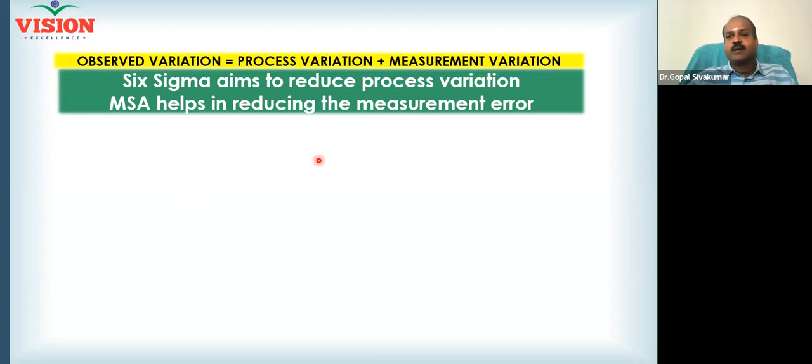So Six Sigma aims to reduce process variation, but MSA helps in reducing the measurement error. First, you should do MSA. Only then proceed with reducing the process variation. So with MSA, we are actually wiping the windshield. If we don't wipe the windshield, it will be unclear and you won't be able to see the road.

So which side is clear? The right side or the left side? The right side is with MSA. The left side is without MSA. If you drive the car without MSA, you probably get a dull, blurred image of the road and then you can't take the right decision, right? So MSA ensures the project team focuses accurately on the process variation. This is with MSA. You are able to see the road. You will be able to see the problem accurately and ensure your improvement efforts are used efficiently.

Otherwise, what happens? You might think that you are on the road and keep your accelerator at a higher level, but actually you are now out of the road. And that could lead to problems, right? So you can see the conditions better and understand the process conditions better with MSA. That is the purpose of MSA.

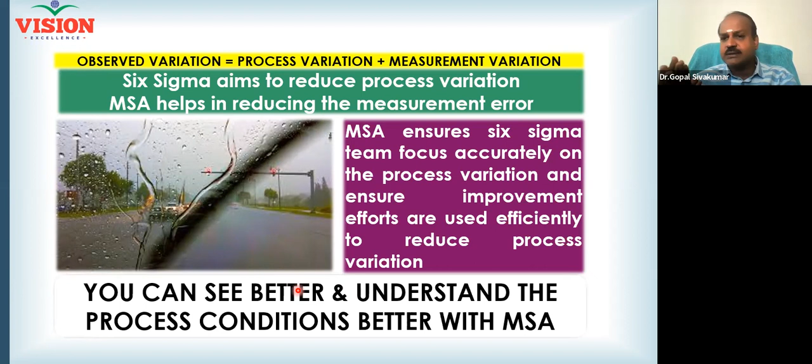And in MSA, there are two types of study. One is to understand our accuracy. Another one is to understand our precision. Accuracy is closeness to the true value. Precision is consistency in our values. Both are important. In order to ensure accuracy, we take multiple readings. Hope all of you agree with my statement. Always, we measure 2-3 times and then use only the average.

Why are you doing so? To bring accuracy. But when you take multiple readings, it is very important that your readings are also consistent. That consistency is checked using precision. And we check precision using gauge R&R.

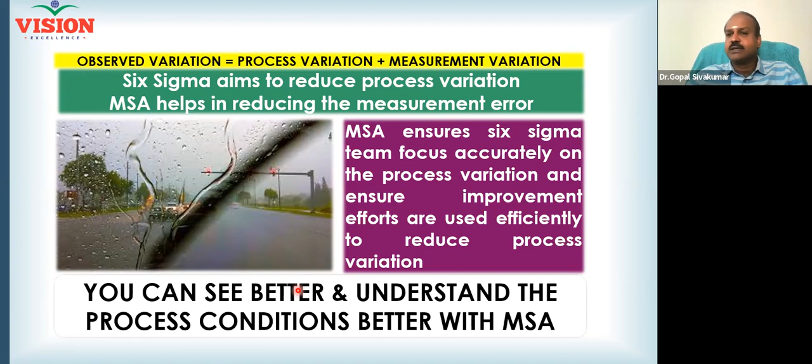Now, all of you first need to understand resolution. I'll explain. Resolution is nothing but the minimum reading that can come from your measuring equipment. Tell me, as far as the inch tape is concerned, what is the minimum reading that can come? 1 millimeter, sir. 1 millimeter. You will be able to measure 1 millimeter. Yes, then the resolution is 1 millimeter.

If you say, sorry sir, I can't measure 1 millimeter using this, I have got a better measuring device, but I will still use this inch tape for measuring, it is in your hands. If you think 1 mm can be measured accurately, then the least count is 1 mm, right? The resolution is 1 mm. In other words, resolution is nothing but the least count.

You all might have used a vernier caliper, dial gauge, and many things, isn't it? Everything comes with a least count. What is least count? That is the resolution. A person at the age of 20 or 25 has eyes with a better resolution. Am I right? But a person at the age of 90 or 95, what will be his resolution? His resolution will be weaker. You need devices with a better resolution so that your vision can be better. Hope all of you understand the meaning of resolution. Am I correct here?

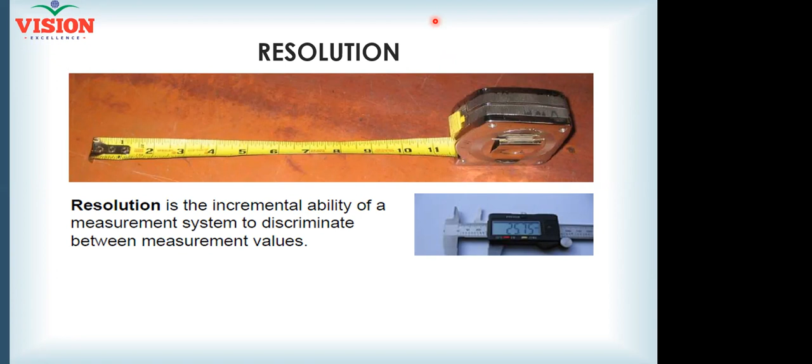Can we all clap for Nurul? This is exactly what I wanted. I need a clap. Nurul deserves it now.

Right? It is not 1 second. It is not 1 by 60th. It is 1 by 100. 1 second is divided into 100. That is why you have 2 decimals, isn't it? So that means the lowest reading that can come is 0.01 second. 0.01 second. I hope all of you have the stopwatch with the same resolution. Am I correct? All your mobile applications.

We are going to do a data collection today, live data collection. Each one of you should use your stopwatch. So keep it ready. So I can also show my stopwatch, right? So here it is. Let me show mine. 00 and 2 more 00, isn't it? That means seconds and 1/100th of a second.

All right. So resolution is the incremental ability of a measurement system to discriminate between measurement values. 1.01 is different, 1.02 is different. Suppose, like Rajesh said, the resolution is 1 second, 1.01 is also 1 second, 1.02 is also 1 second. Do you understand the problem now? If the resolution is just 1 second, it will read everything as 1 second. 1.01 also read as 1 second. 1.02 also read as 1 second. 1.4 second will also be read as 1 second only. Am I correct or not?

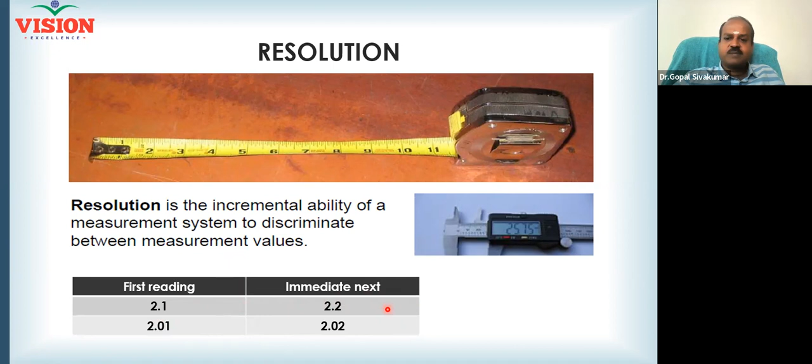So when your equipment rounds 1.4 to 1, it captures an error of 0.4. If the 0.4 is very important to your customer, then you will be at risk. So the better the resolution, the better will be your readings. So the first equipment gives readings like this, 2.1 and 2.2. Now tell me, what will be the resolution for the readings of the first row? What is your guess? Come on, try to answer. I think Nurul has it, 0.1 is the resolution. That's all. You're right. This is what we discussed the last 10 minutes.

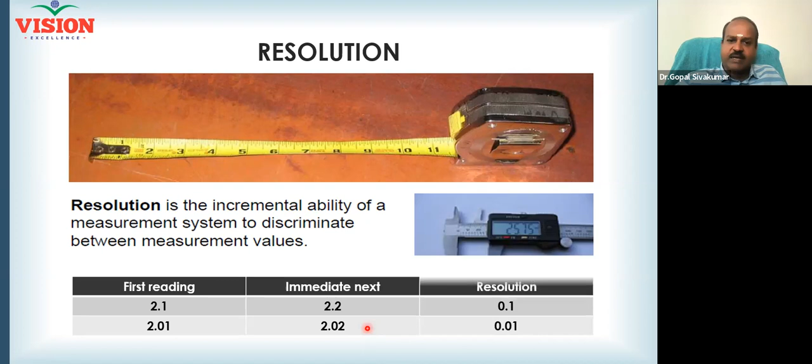And the second row has come from another measuring equipment. It gives readings in this manner, 2.01 and 2.02. Now, what is the resolution? 0.01. Which measuring equipment is better now? Row number 1 or row number 2? Number 2, sir. Number 2 gives better insight than number 1, right? So that's why equipment with better resolution can give better NDC.

So what is NDC? NDC is the discrimination index. How do you differentiate one from the other? Nurul is a different participant. Rajesh is a different participant. Anand is a different participant. I would understand that; the faces are different. If I say all of you are the same, then my discrimination is very bad. Similarly, your measuring equipment should be able to differentiate a good part and a bad part.

Within the good parts, there will be different types of good parts. All of you agree with me? Certain parts will be too good. Certain parts will be just good. If you want to capture everything, your equipment should have better resolution, and so a better NDC, which is called the discrimination index, also known as number of distinct categories. Once the equipment's resolution is known, you can judge whether the equipment is better or not in comparison to another. We always compare one measuring equipment with another mainly based on the resolution and the discrimination index, right?

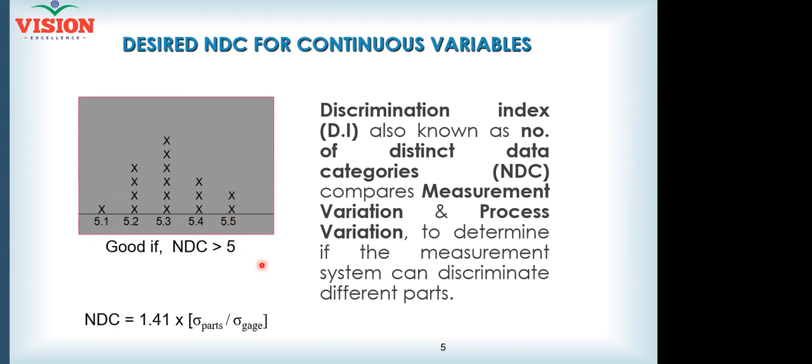Suppose the resolution is 0.01, now tell me how many readings are possible between 5.1 and 5.2? More than 10 readings. 5.11 possible, 5.12 possible, isn't it? In every range you will get 10. NDC will become close to 50. So having a better NDC gives better information. Am I correct now? Better resolution makes your NDC better. So now this is a simple example you have understood very easily.

Even if the situation complicates, if your data has a lot of decimals, you will be able to calculate NDC using this formula. I kept a discrete number of values to make the explanation simple. But when I bring a lot of decimals, let us say 5.1023, in that case you can calculate NDC using this formula. That is when your data is continuous, you can use this. Sigma of parts, sigma of gauge. For that, you must understand what is sigma of parts and what is sigma of gauge, which I will be explaining. Shall we proceed now?

Are you good with NDC? Yes, sir, you can proceed. The industry requirement is NDC must be minimum 5. If NDC is less than 5, the equipment is straight away unfit. 5 in the sense within your preferred range. Whatever range within which you want to collect the data, in that range, NDC should be minimum 5.

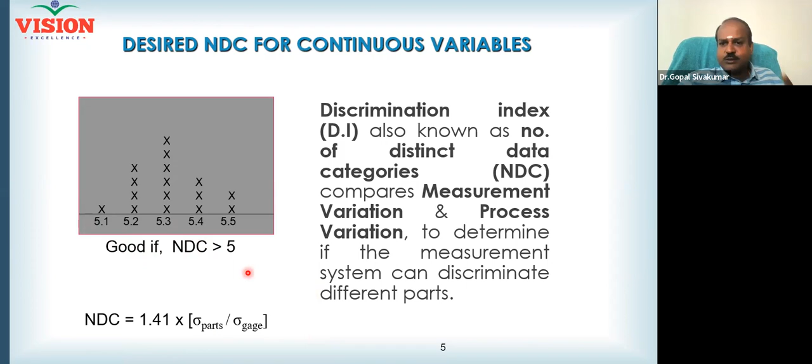Now I want one of you to read out the definition of the term repeatability. Then we will talk about it. Can one of you read out the statement on repeatability? Repeatability is the consistency of a single appraiser to measure the same part multiple times with the same measurement system. It is related to the standard deviation of the measured values.

Thank you, Mr. Anand. So what Mr. Anand is saying now, repeatability is the consistency of the single appraiser. Let us say Anand is the appraiser. I want Anand to measure a product. Let's say I have a product like this, a wooden block. I want to know the diameter of the wooden block.

And Anand has got a vernier caliper. Now he will use the vernier caliper and tell me the diameter of the wooden block. If he takes just one reading, I'm not very confident of the reading. So I expect Anand to take multiple readings, calculate the average and figure out the dimension of the wooden block. Am I correct with my idea now?

Because a wooden block can have some cylindricity issue, isn't it? It can have a different diameter. Am I correct or not? So I take multiple readings. He will take 3-4 readings, and then the average of the readings will be considered as the diameter.

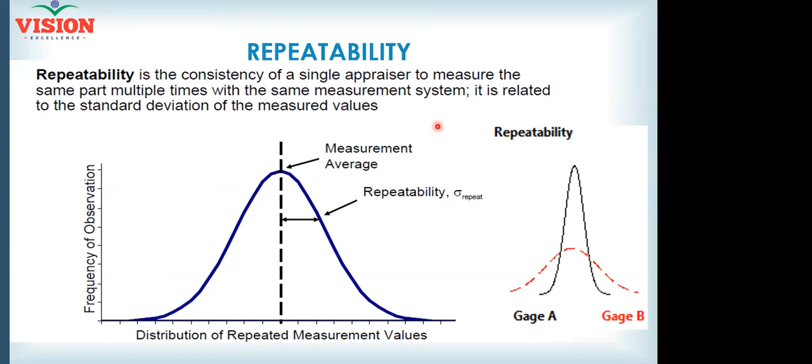What you are doing is correct, because like repeatability, there is one more error called reproducibility error. In order to capture both forms of error, you must involve individual appraisers. You should also involve all the appraisers. Okay, got it, sir. Thank you. So reproducibility is the consistency of different appraisers in measuring the same part with the same measurement system. It is related to the standard deviation of the distribution of appraiser averages.

Now I have a cylindrical block. Let us say I have 3 cylindrical blocks. All the 3 are the same. I gave 1 to Mr. Anand, 1 to Mr. Rajesh, 1 to Mr. Noorul. What is the standard reference value of the block I have? 30 mm. All right. Now Anand is giving me a reading. Rajesh is giving me a reading. Noorul is giving me a reading.

What is the expectation? All the 3 readings should be the same. Am I right? Yes or no? Yes, sir. Because I gave the same product, exactly the same. Only thing is I did not tell them in advance. I asked them to measure separately. Now all the 3 are giving the same reading.

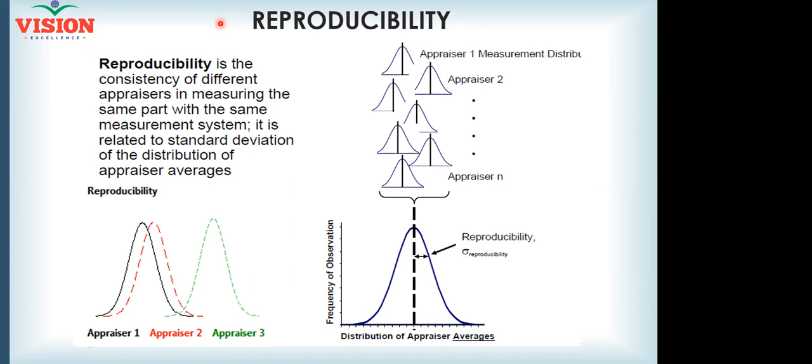Out of all the elements, the majority of the elements are controllable. But the environment you cannot control, isn't it? That is uncontrollable. Any element that is uncontrollable, you must consider as environment. If you can't control it, then try to control your readings by effectively controlling the controllable elements. Do you understand what I'm speaking? Simple English, right? Don't waste your energy trying to control the uncontrollable. Leave it. So focus on the controllable elements.

You can improve the appraiser. You can provide him training. You can improve the operational definition. If the person understands only Hindi, you can give the statement in Hindi only. You can give a picture. You can show him a video. Measuring equipment can be well calibrated, well maintained. And then the part, the standard reference. The standard part is maintained in a condition that it remains a standard part.

See, we are trying to understand the capability of our measurement system in giving us an error-free reading. Two types of error are possible. One is repeatability error, which is inconsistency in the readings provided by a single appraiser. Another type of error is reproducibility error, which is inconsistency in the readings when we involve multiple appraisers. All right.

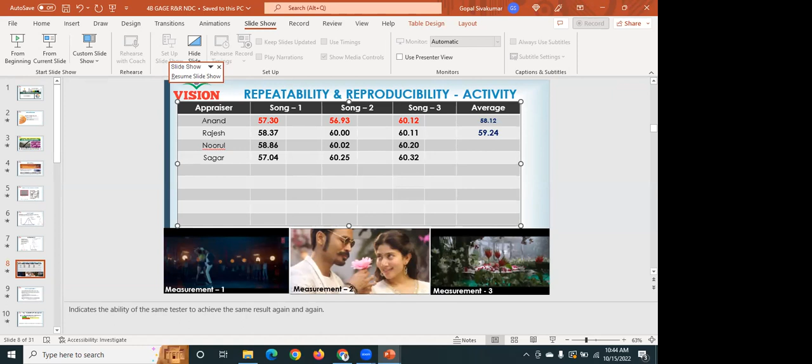Similarly, can I get the average of Rajesh, Noorul, and Sagar? All of you, please calculate and let me know. Now, average of Mr. Rajesh. 59.24. And then the third one, Noorul? Give me a number. Are you calculating, Noorul? For Rajesh, a correction, it's 59.49. Noorul, it is 59.69. Okay. Then Sagar? 59.20. Very good.

Now, I could clearly see a difference in the average values of the appraisers' readings. Anand gave 3 readings. Since the part is the same, I calculated the average of the three readings. Similarly, the average of Rajesh's readings, and similarly with Noorul and Sagar. Now, can you notice a difference between the averages? This difference between the averages is actually called reproducibility error. You don't have to work with the individual readings. You work with the averages to calculate the reproducibility error. Hope it is clear to all of you, how to calculate the repeatability error and how to calculate the reproducibility error.

The reproducibility error is carried in the variation among the averages. So I calculate a standard deviation using the appraiser averages. That will give me an estimate of reproducibility error. Similarly, when I calculate the variation horizontally, like the first row given by Anand, that will be repeatability error by Anand. Second row, that is repeatability error by Rajesh. So now I understand how to calculate the repeatability error and how to calculate the reproducibility error.

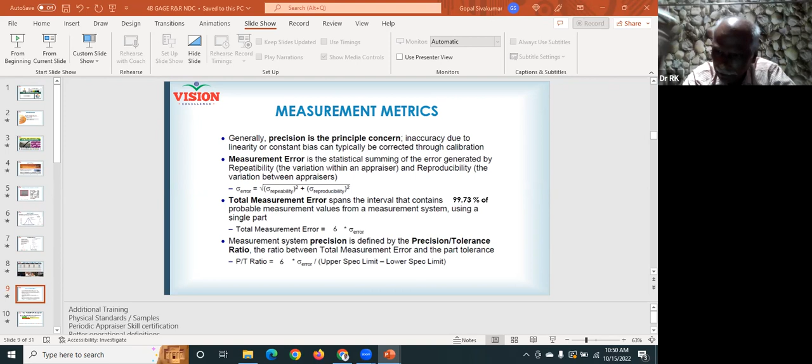That's what my doubt is. Yes, start with one person, then multiple persons, then with the standard process, standard item. Yes, so that actually gives us, correct me if I'm wrong, another aspect also, that is about the precision, that is about the accuracy, how close it is with the standard, right?

So maybe one hypothetical situation: the standard is 60 seconds, everyone measures it around 64-65 seconds. So there is less repeatability error, there is less reproducibility error, everyone is measuring 64-65, but still it is far away from the standard. That means it is not very accurate.

So that brings us, and that is why RK sir has mentioned 3 statements, right? Yes, so ultimately we need to have the accuracy as well. That means how close the whole bunch of observations is to the actual value. And this again, as GSK has pointed out, is only an estimation. Okay, yeah. So ultimately, we want our reading to be accurate.

Accuracy is closeness to the true value. If you are away from the true value, you call it bias. Your bias is more because there is poor reproducibility. Your bias is more because there is poor repeatability. You have more reproducibility error, more repeatability error, and as a result, there is more bias.

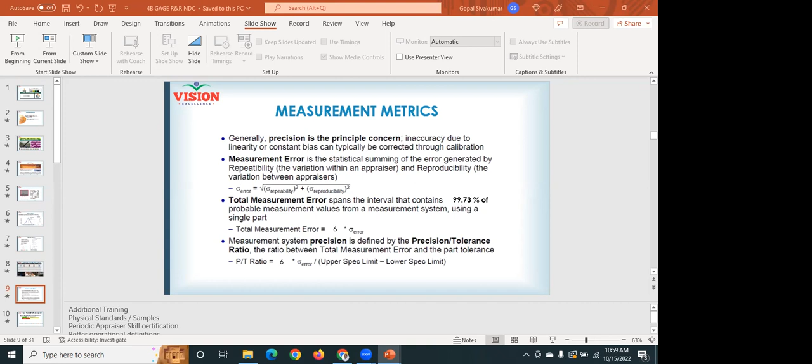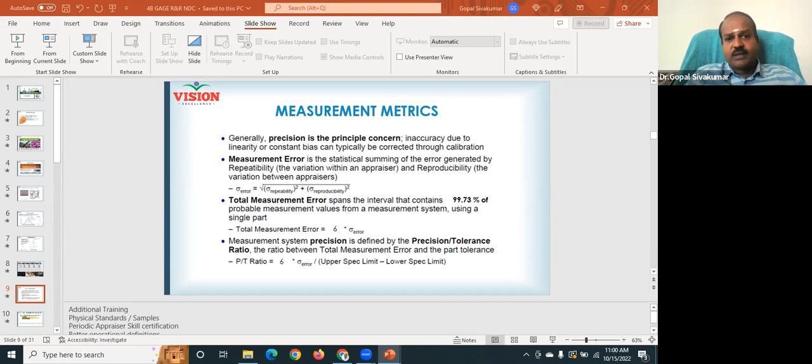Precision error. See, the numerator is the error in the form of repeatability and reproducibility. We also multiplied by 6 to get the overall total error. The total precision error we may commit is compared against the tolerance. Within the tolerance only our process is going to operate. All your readings are going to come in this. Now you are comparing the error estimate against the range of the limits given by the customer. This is called precision tolerance ratio. The other name for precision tolerance ratio is gauge R&R. This gauge R&R value should be less than 10%.

Otherwise, what happens? There will be heated arguments between you and your customer. You will say the product is good. Customer will reject the product. You will check and send the product to the customer place, which is 500 kilometers away from your factory. After receiving the product, customer will check and send back your entire lot. Will it be a problem to your business or not? Yes. Your quality inspectors have checked it. Now the entire lot reaches the customer site, and now the entire lot is coming back.

This is called type 1 error. Sorry, this is called type 2 error. I'm sorry for that. Because you have sent the product, but customer says it is defective. If you send a defective item to the customer, the error is called type 2 error, which will be very costly, isn't it? Yes. The transportation is lost, the item produced is wasted, and there are a lot of problems. Type 2 error, consumer risk.

Similarly, one more problem can happen. Your own quality inspector can reject good products within your factory. Possible or not? Yes, it's possible. Now the manufacturer is under risk. That is called a type 1 error. If you allow the measurement error to increase, the type 1 error and type 2 error will also increase. Your cost of poor quality will increase excessively.

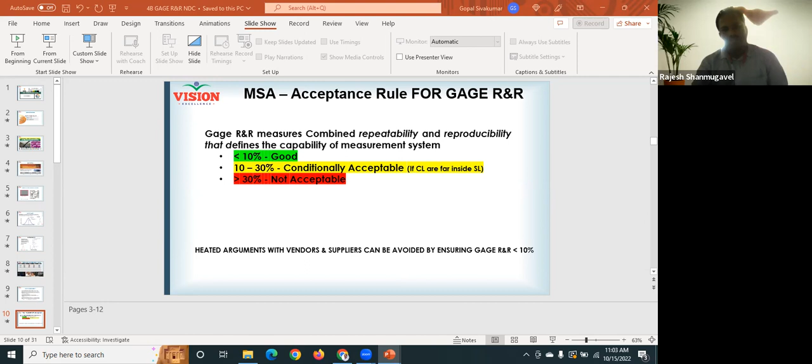Many people don't tell this secret. I am telling you. If your control limits are close to the specification limit, you need to stay only here. Don't use the condition. Don't take advantage of the liberty given. The second condition says 10 to 30% of the error is acceptable conditionally. You can use it subject to the condition that your control limit is well inside. Your process is doubly capable, which is nothing but the Six Sigma process. If your process sigma level is not 6, you must stick to applying only the first condition.

Many people misinterpret this, saying that if the equipment is costly, then it is conditionally acceptable. That is only a situational remedy. It is not the technical remedy. All of you understand my statement here? But in any condition, more than 30%, the measurement system and the data collected is considered useless. Please throw it away. Whether you are doing an improvement project or a big hardcore research, the data collected is considered useless data and it deserves throwing into the dustbin, right? Hope all of you understand.

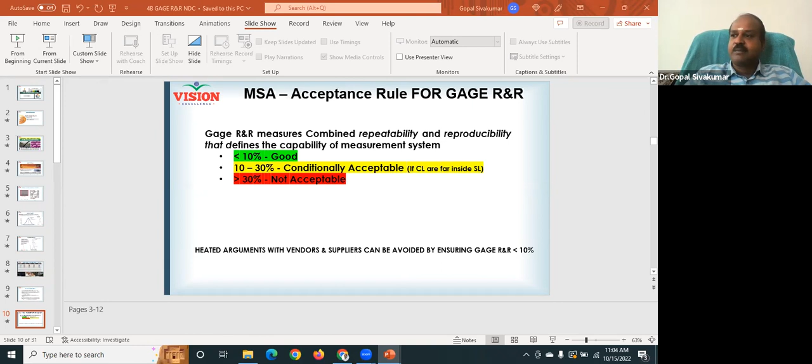And so heated arguments with vendors and your suppliers can be avoided by ensuring the gauge R&R is less than 10%, right? And see here, the customer tolerances are given.

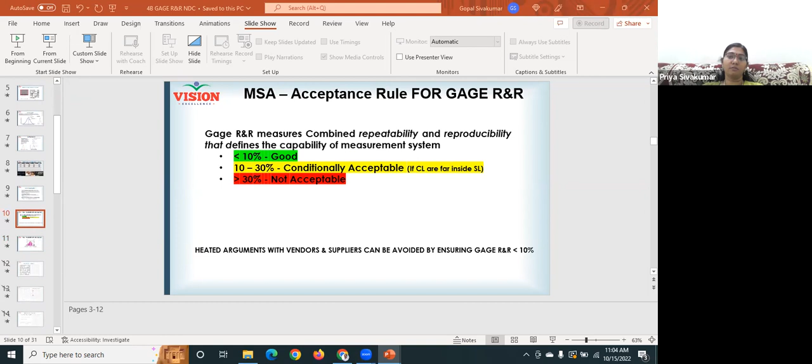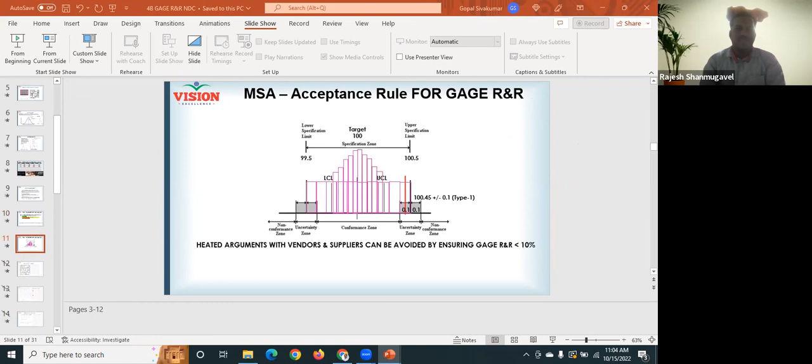Upper spec. Yes, madam, sorry to interrupt. Your screen is not in presenter mode. Oh, really? Yeah. How is it then? It's in the normal mode only, but it is fine. I think I'm able to present. It's going well. Okay now? Yeah, it's fine. All right.

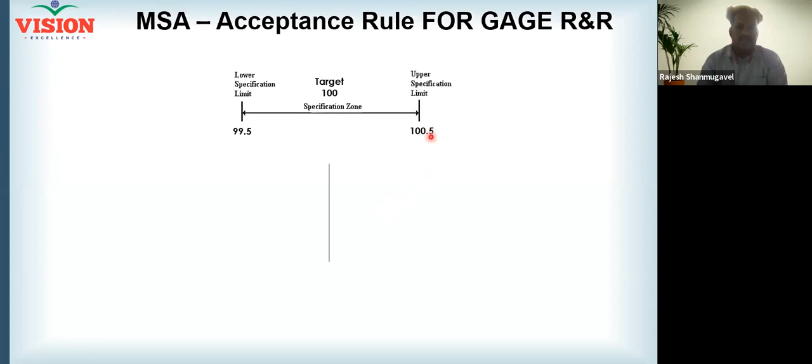So upper spec, lower spec, target value. And now I am just drawing something. Can you see the gray area here? Yes. The gray area is called zone of uncertainty. Here only the problem comes. Here also. This gray area is called uncertainty zone. This zone is called conformance zone. Conformance zone means no problem with the decision.

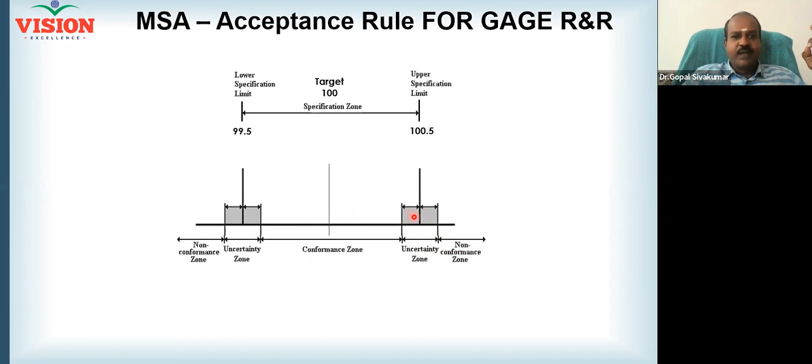But this gray area means a problem with your decision, leading to type 1 error and type 2 error. Non-conformance zone means here also no problem with the decision, but your products are clearly getting rejected. Here your products are clearly getting accepted, but here unclear acceptance and unclear rejection happens. Good product is rejected and bad product is accepted. That is the problem. Why is this happening? Due to the gauge R&R.

And see here, the customer requirement is 100 plus or minus 0.5. Your product dimension is 100.45. When 100.45 is the actual dimension and your appraisers are measuring, due to the error, 100.45 is now recorded as 100.55. Now tell me, what will be your decision? Do you accept the product or reject the product? Reject the product. You reject it. But what is the real dimension? 100.45. 100.45 is inside 100.5. Customer is ready to accept, but your own quality inspectors are rejecting.

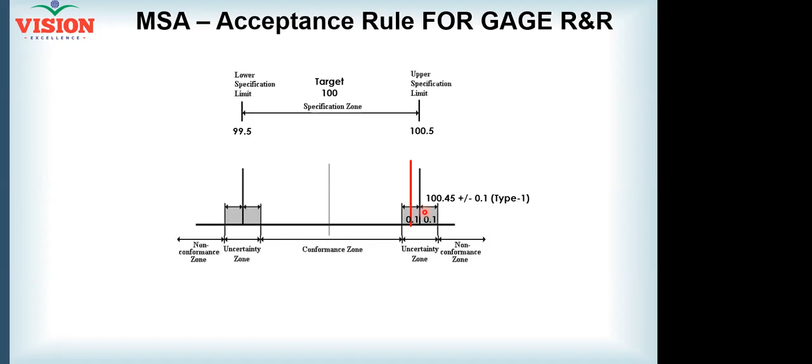Now, what is this error? Type 1 error. So this is otherwise called manufacturer's risk. The manufacturer is under risk because of the error. That is why it is important for us to control it. Why is this happening? Your production process is poorly designed. Sigma levels are bad. Look here, you produce everywhere. Where should you produce? You should produce around the target.

Am I right? Very first day, RK made a statement. Taguchi says deviation from the target is loss. Where is your target? Your target is here. But where are you producing? Far away from the target. As a result, type 1 error is happening. So don't produce in this manner. Try to produce like this. Can you all understand now? Yes. Now the second condition becomes applicable to you. What is the second condition? Control limit. 10 to 30% error is also tolerable now.

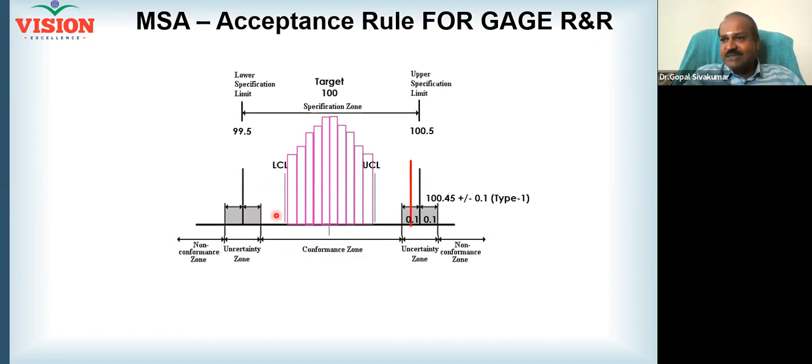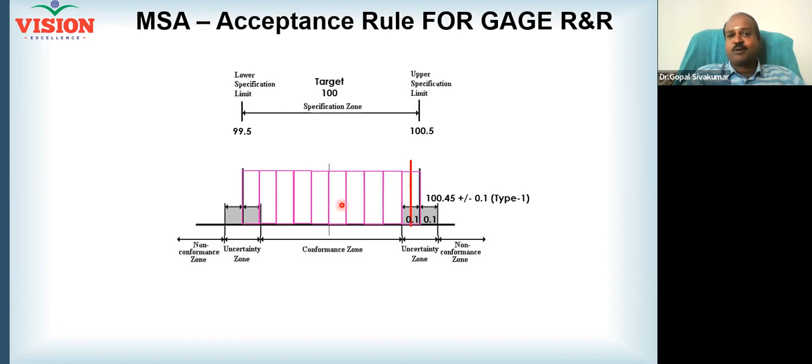Why? You have now additional tolerance. Do you understand? Earlier, there is no room for additional tolerance. You have occupied all the tolerance. Your process is just capable: 3 sigma process, CP/CPK equal to 1. Now the process is doubly capable: 6 sigma process, CP/CPK equal to 2.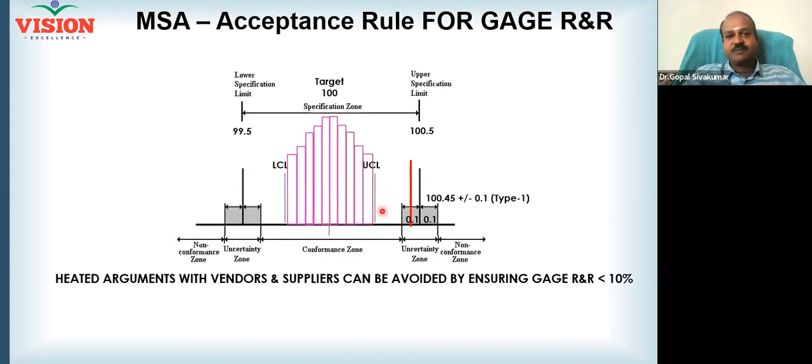Now even an error of 10 to 30% is acceptable conditionally. Though it is unpreferred, it is still acceptable because type 1 error will not happen. Type 2 error will not happen because you are producing here only. Even if you wrongly place something here, the decision is not going to get affected. Right? That is the advantage of having it.

So this is a gauge R&R study report using Minitab. I'll explain this after your coffee break. And if the problems are understood, you should be very good in reading the graphs. Histogram, the first one is a bar chart. This is a control chart. This is another control chart. This is called a dot plot. This is called a box plot. This is called an interaction plot.

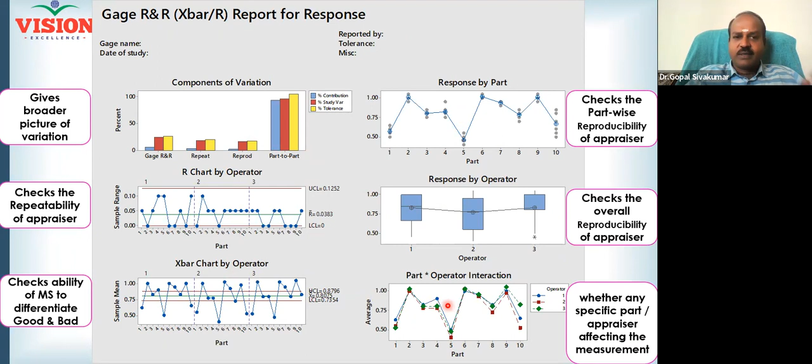If you are really good in data collection and really good in graph interpretation, you will be able to figure out the root cause. You will be able to bring down even the gauge R&R, right? That we will be discussing a little later after the tea break. So I stop here so that we can go for a coffee break and come back.

So shall we all take a picture for today? Attendance. Yes. All of you, please confirm whether my Minitab screen is visible to you.

That's visible. Yeah. Now, in Minitab, there is a Stat option. Stat, Quality Tools, Gage Study. Can you see something? Create Gage R&R Study Worksheet. Yes, sir. First of all, you should create this worksheet. And now, number of parts. My recommendation to all of you is to type 10 here.

Minimum 10. How many parts minimum should you have? You should have 10 minimum. I have played only 3 songs. I could have played 10 different songs to get a better estimate of all your capability, but due to time concerns, I reduced it to 3. But you have to have minimum how many? 10 parts. And then number of operators.

How many operators did we keep? 3. And it depends; this is sampling. Yes, appraisers, 3 appraisers. This is sampling, depending on the number of appraisers that may be involved in real time. If in real time there are only 3 appraisers involved, involve all 3. Isn't it? If there are 300 people, anybody can collect the data for you. Then you have to believe in the sampling technique. And please note again, sampling technique is a big area, which we will be throwing light on again on day number 5. All right. So number of operators 3 is a good number.

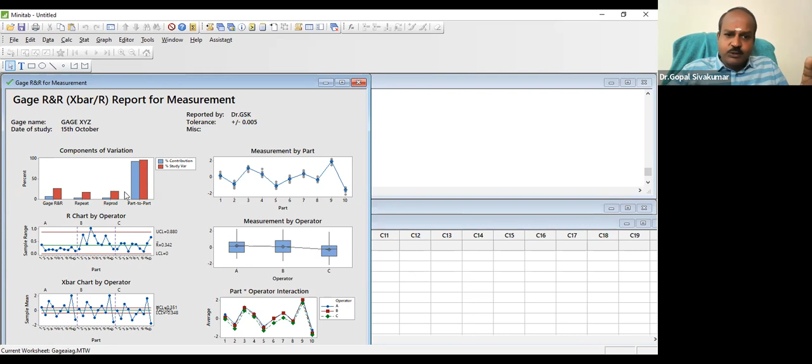So you should be very good in reading all the graphs so that you can actually figure out the root of the problem. Now let us go to the statistical analysis report. This is called the session window. Here is the gauge R&R study report. And see here, whatever I typed is now appearing here. Gauge name XYZ, date of study, all those things are appearing. So this is called the gauge R&R report.

Now in the report, there are two tables. The first table is here. I am going to write something here. This is based on variance. All of you know variance? What is variance?

Square of? So difference. No. Variance is square of standard deviation. Variance is square of standard deviation. And now there is one more table here. This is based on standard deviation.

According to the standard deviation only, we studied. What we studied? Gauge R&R should be less than 10%. Do you understand? So this rule is based on standard deviation. So don't refer this first table. Please refer the second table because the rule what we studied is based on standard deviation. Now, in that table, the first row straight away gives a value. What is the value it is giving?